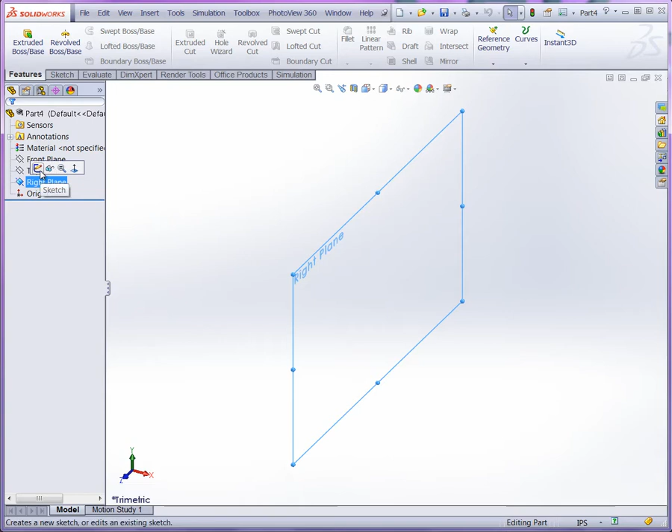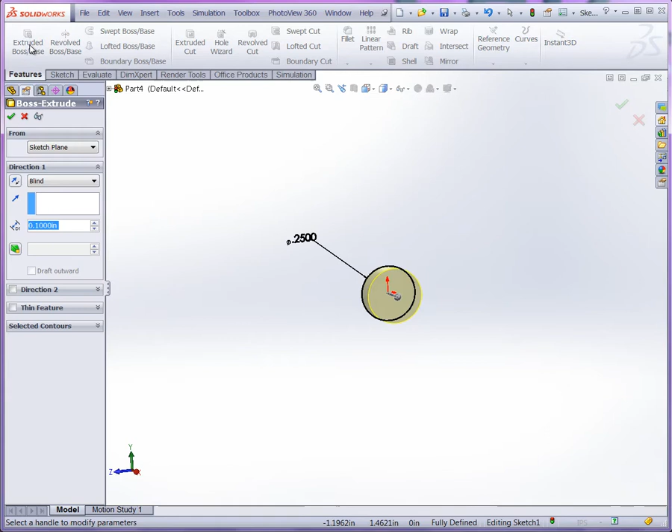Alright, let's begin the handle by working in the right plane and creating a new sketch. Here, let's establish the handle diameter with the sketch circle, and then I'll add a smart dimension of 0.250. Okay. Next, we'll go to Features and we'll do an Extrude as a mid-plane extrusion here for a total width of 3.00.

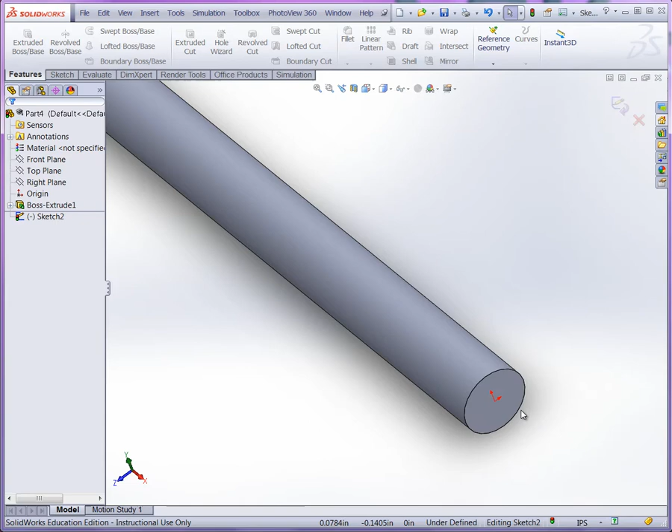Now, the one thing we have to create here is the knurl. And the knurl here, there's going to be several approaches, but one would be simply to model it, and we could do this by using, let's say, the front face here or the side face of the handle and creating a new sketch. Next, if I get normal to that view, let's go ahead and select the face and get normal to the view.

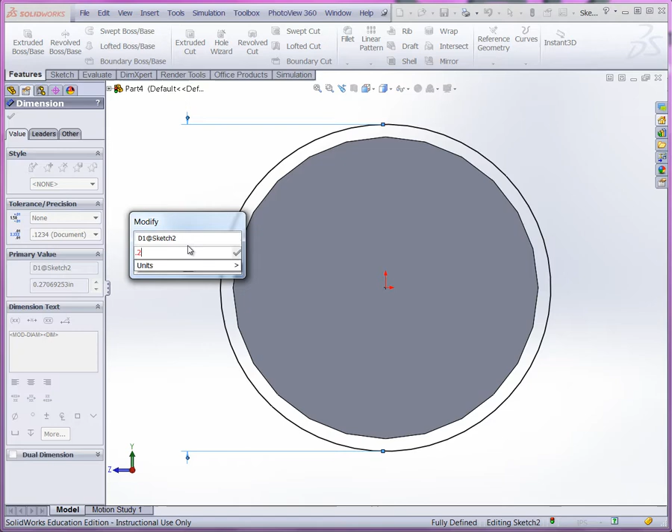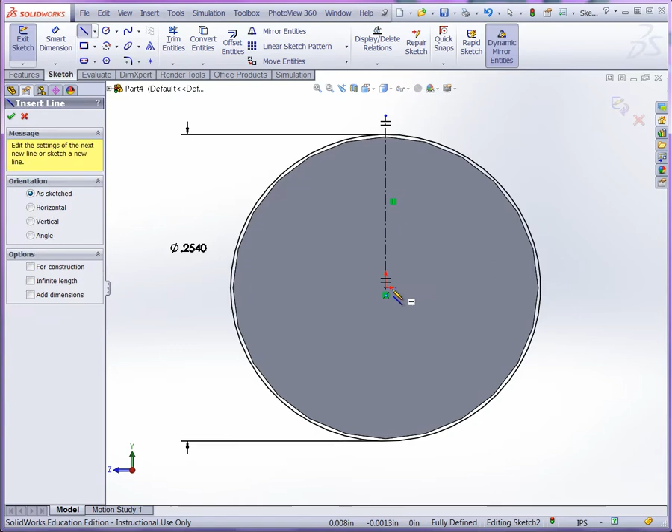I want to create another sketch circle here and use a dimension of 0.254, and then I want to use a center line from the origin. I'll select that center line to create a dynamic mirrored entity and continue with another line here, also from the origin, and we could just finish it here on the coincident with the sketch circle.

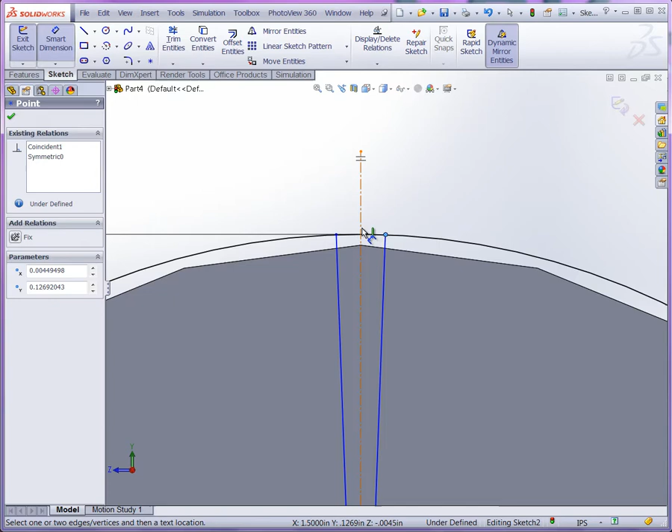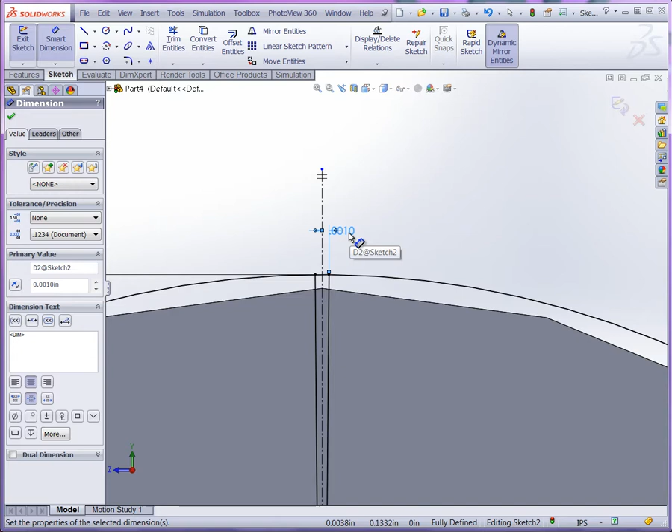Okay, now we'll also use a smart dimension, and I'll make this about, let's go 0.1. I'm sorry, 0.01. 0.001. There we go. Okay. And we could probably make that a little bit wider based on any kind of knurl specifications that we want to use. Let's make it 0.02.

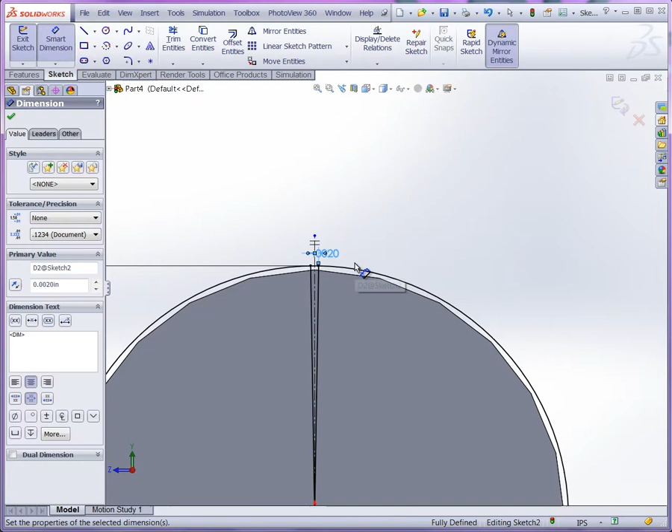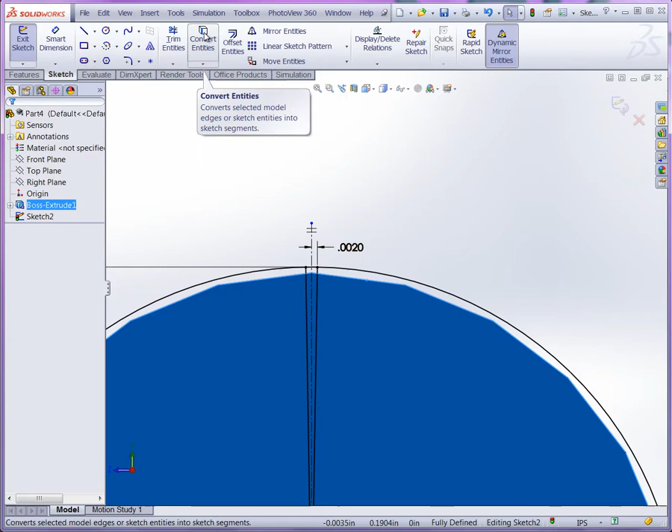Actually, so yeah, let's make this 0.002, and then we'll come in and clean it up. Also, actually, I want to use this edge to convert it, and this way we'll have a closed profile, and we'll use trim to clean everything up. There we go.

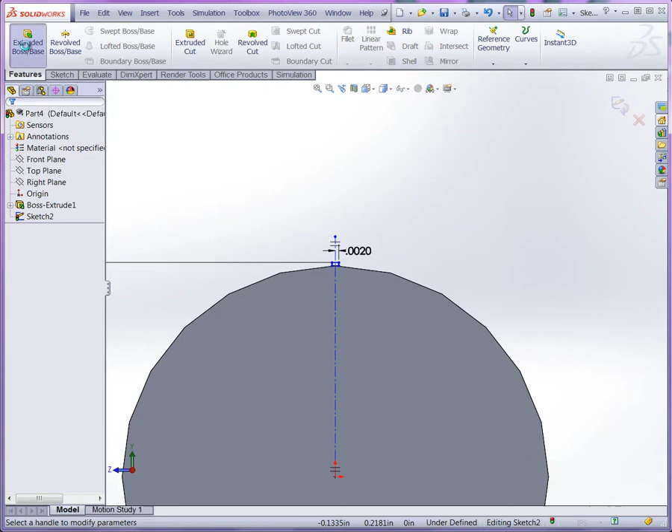Now, what we can do here is we can use, let's say, an extrude boss, and we'll reverse the direction, and we'll go about 1/2 inch. So you can see there. And that should be enough to get it into the cap. So we can also merge the result.

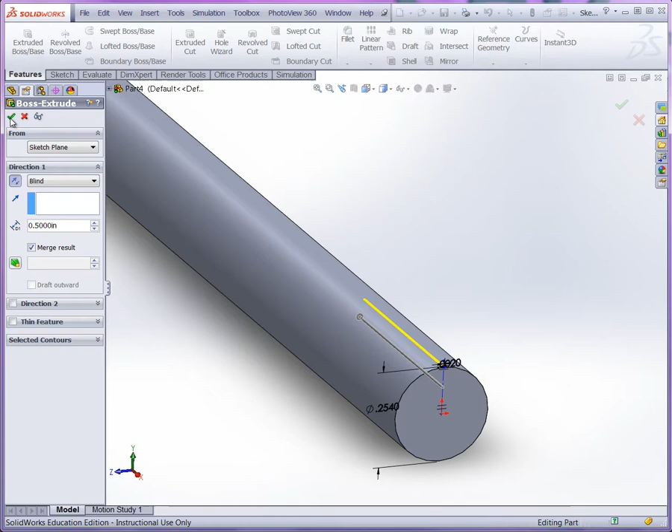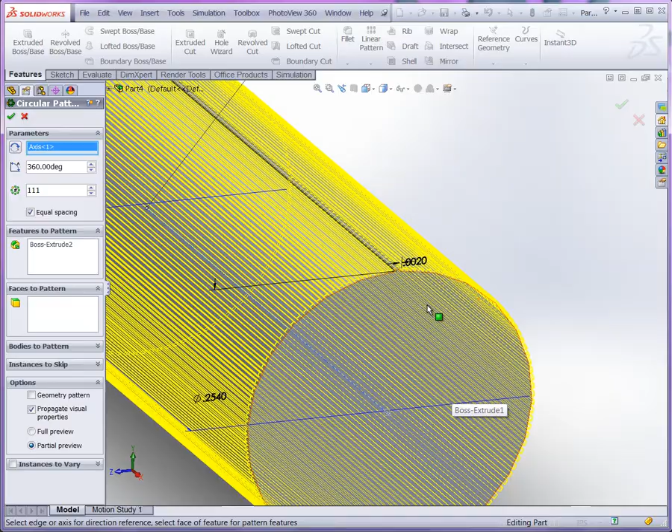And now using that boss extrude together with, let's go ahead and show temporary axes. We'll pre-select the Boss Extrude 2, and then we'll use our pattern for a circular pattern here, and we'll use that temporary axis on the cylinder. And here you can see we got quite a few of these spread out, about 111 of them with equal spacing. And again, you can adjust to any specifications of knurl that you want to, but we'll go ahead and use this one.

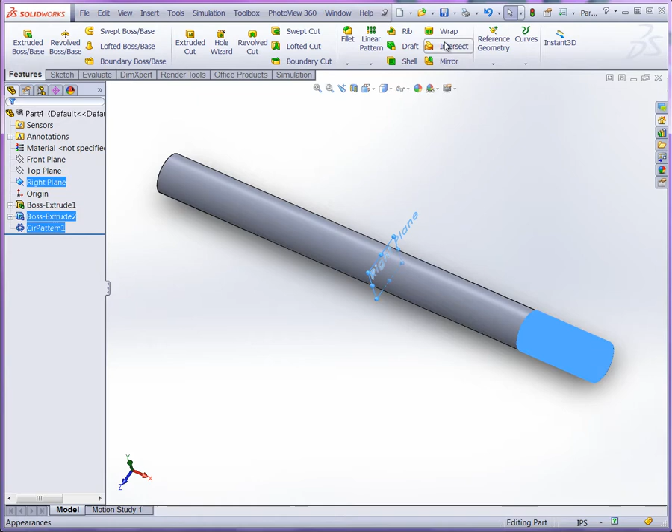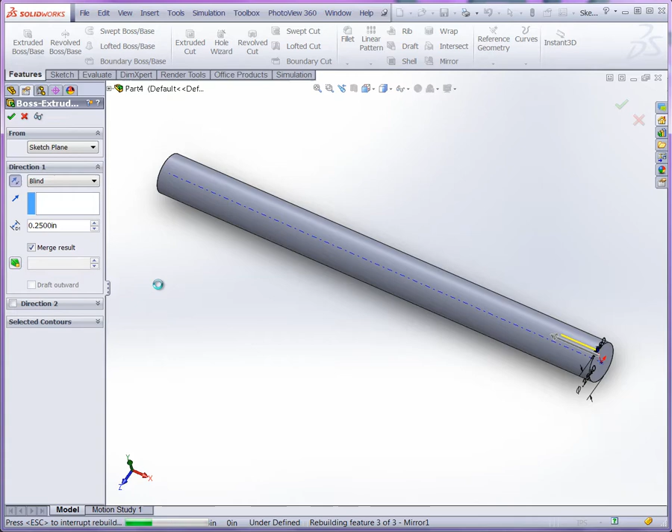And now we'll go ahead and use the right plane and pre-select the circular pattern and the Boss Extrude 2, and we'll use mirror now. Okay, and this makes it really easy. Let's say if we wanted to shorten this knurl. So if I right click on the Boss Extrude, I go to Edit Feature. Let's say I didn't want 0.5, let's say we just needed 0.25 here. And click OK to update it. And so there you go.

So by using the patterns and the mirror, we can easily make changes to our knurl just by editing one of the features. And we could do the same thing with our sketch lines here to change the profile of that knurl. Alright, now you can add your material and prepare your technical drawing view.